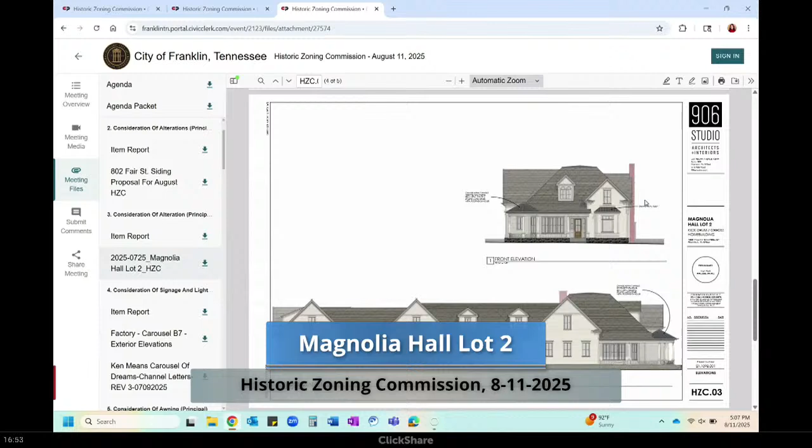The proposal includes an alteration to the approved plans to change the roof material on the conical porch element from asphalt shingle to standing seam metal. The standing seam metal proposed is already found on the front facade over the box bay window, so its use on the front porch roof is appropriate. Staff recommends approval of the roof material alteration with conditions.

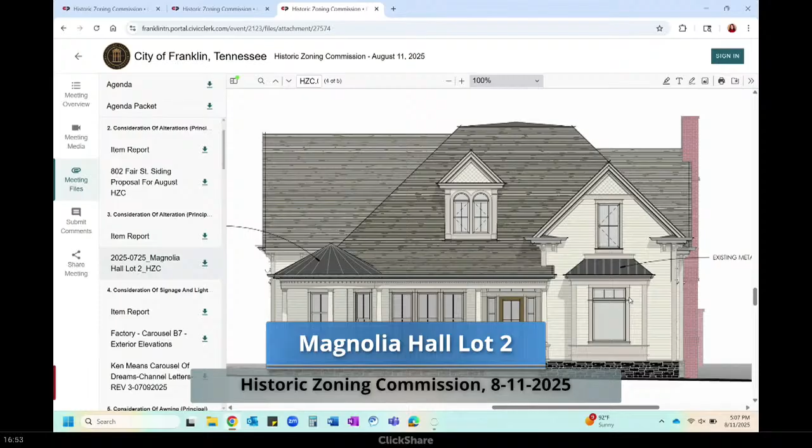Thank you. Ms. Lombard noted the reason for the change was that their shingle manufacturer would not warranty shingles on that shape, and she offered to show samples of the material if the commission would like to see them.

Any citizens want to comment on this one? Seeing none, I'll take a motion from one of the commissioners. Motion to approve with staff conditions. I'll second. Any discussion?

Man, you're a talkative bunch tonight.

Hearing none, I'll say I like that it coordinates and has a little metal. I think this started out with a little metal on it at some point, didn't it? It did. So this is a return to that, and I think we're trying not to draw too much attention to it. The shingle was probably a little toned down from that, but it makes sense why they need it to be metal, since it's a little low sloped.

All right, let's vote. All those in favor of the motion to approve with staff conditions, please say aye. Aye. All opposed? The ayes have it. Thank you very much.

Item number 4: consideration of signage and lighting at 230 Franklin Road, the Carousel Building.

The property at 230 Franklin Road is located in the Franklin Road Historic District. This proposal includes a request for the installation of 2 wall signs on the new Carousel Building at the factory. The signs are proposed over the entrance and windows on the front and rear elevations, and will be 19 feet by 4 feet 6 inches, or 85.5 square feet each, located approximately 17 feet 6 inches from grade.

The guidelines recommend wall signs be a maximum of 9 square feet, proportionate to the building facade, and a maximum height of 12 feet from grade. The proposed size and placement exceed these recommended maximums. Staff recommends denial of the application based on these guidelines, but if the commission votes to approve, recommended conditions are included.

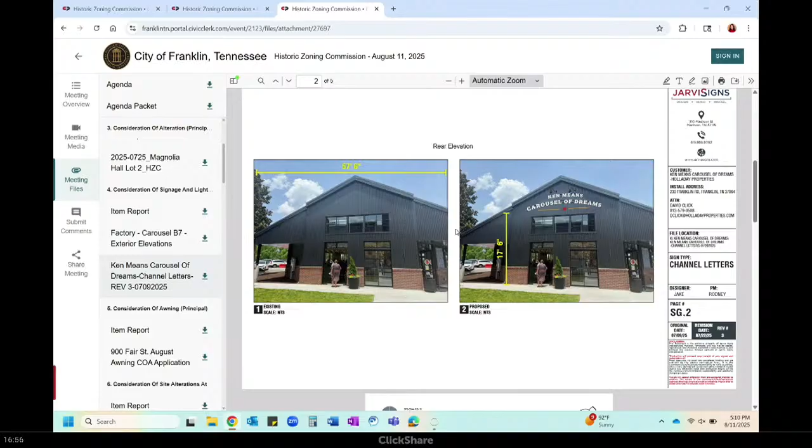Mr. Click explained they reworked the proportions of the sign, getting it down to 57.5 square feet, which aligns with a mural already approved for one of these elevations. They were able to keep the sign looking the same and keep the proportions the same, but reduced the overall scale down to 57.5 square feet.

Staff confirmed the mural was going to go in this same location, in that gable, approved with a modification of standards for placement, though the mural itself was never reviewed or proposed. They are now proposing a wall sign instead in the same location. The modification of standards was approved prior to alterations made to the building, which changed the location it could be in, since windows were added that pushed it higher.

Thank you, Mr. Click. If you'll have a seat, we'll see if there are any citizens here who want to comment on this. I don't see any. All right, let's hear from the commission. A motion, please.

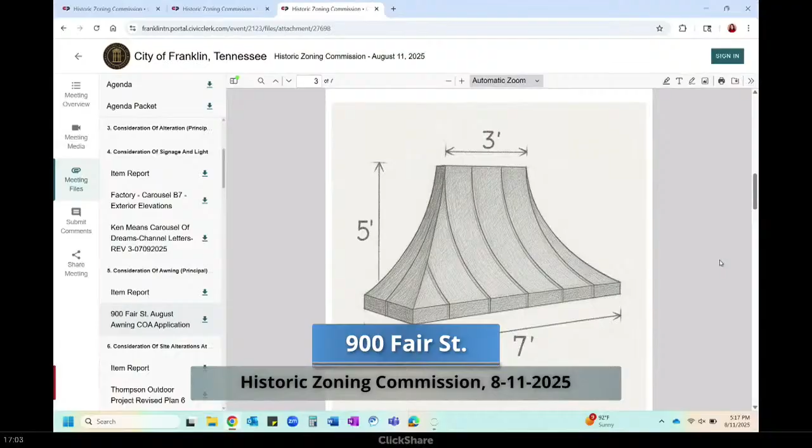This proposal includes the removal of the existing green arched fabric awning and installation of a copper awning with brackets over the entrance to the front porch. The proposed awning style utilizes a Juliet design, and the bracket design is proposed to be metal with a scroll design. The guidelines recommend using duck canvas or cotton and polyester blends with or without acrylic treatment, avoiding vinyl awnings, and that new architectural features should not be added.

The use of a copper material for an awning is not supported by the guidelines, and the proposed brackets add an ornamental detail that is not seen elsewhere on the front facade of the historic building. Staff recommends denial of the application based on these guidelines: use a material that aligns with the guidelines, and new architectural features should not be added.

If the commission votes to approve the application, there are conditions recommended. Mr. Scott, anything you want to add?

Sure. We understand that copper materials would not be prevalent in the historic district, although there have been copper awnings approved — I actually showed a couple of pictures there, the copper one that came through the commission and is in place right now. The color, we believe — we're choosing copper because we know it will patina down to look a lot like the rest of the house, which is bronzed.

Our fabricator very highly dissuaded against just a standing seam metal. He said that type of awning would not bode well in a metal material that's not copper — it would look cheapened to some degree. So we very much want to get rid of the rounded green cloth awning, which I don't think is very aesthetically pleasing to anyone that looks at it.

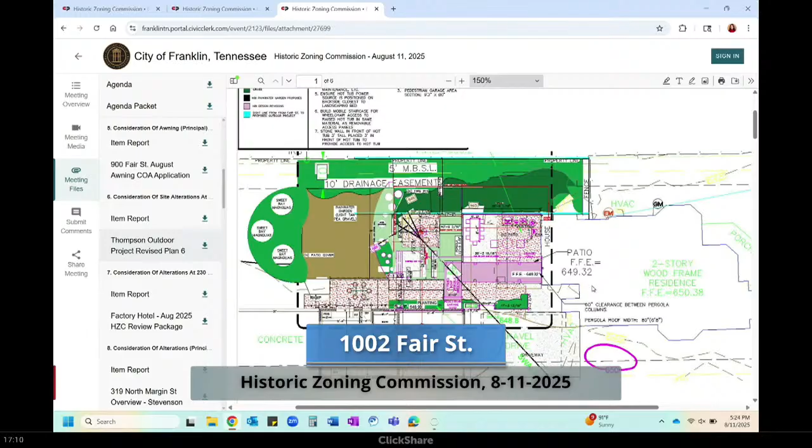The property located at 1002 Fair Street is located in the Hinchyville National Register Historic District, and this site features a circa 1885 one-story Queen Anne-style house with elaborate detailing and a circa 1950 concrete block garage, both contributing to the district. The proposal includes a request for two site alterations: installation of a covered pergola walkway and installation of a pea gravel rain garden.

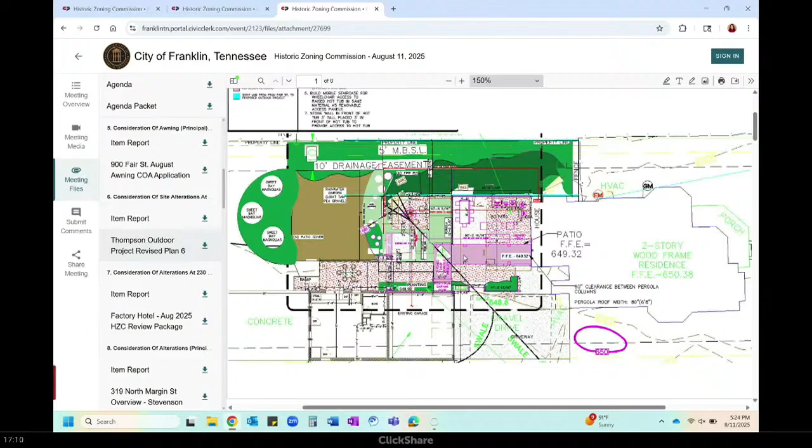The first request is to install a covered pergola walkway from the rear of the building to the side of the accessory structure, and the second request is for installation of a pea gravel rain garden in the rear yard. The guidelines recommend the following for other site and setting alterations.

Generally, site and setting alterations should be considered appropriate when undertaken in locations not visible from public view, do not involve removal of historic features, and do not detract from or overwhelm the context of the historic districts. The pea gravel rain garden will not be visible from public view, does not involve removal of historic features, and does not detract or overwhelm in the context of the historic district.

The design of a pitched covered pergola walkway will be visible from public view, and a pitched pergola design is not seen in historic districts and may overwhelm the context of the district. Staff recommends denial of the pergola walkway based on the guideline that site and setting alterations should be considered appropriate when undertaken in locations not visible from public view, and staff recommends approval of the pea gravel rain garden with conditions.

Thank you. Okay, thank you. Applicants, whichever one wants to talk, just let me know who you are. Well, my name is Jeff Fleischauer. I'm the contractor.

We were wanting to do the covered pergola on the walkway simply to give us a little bit of protection walking from the house all the way out to the garage. And then the pergola adjacent to that would be just coming off the house at about 10 feet and then coming straight out, and both of which are behind the house completely. So as far as visual from the street, you'd have to really try to see either one.

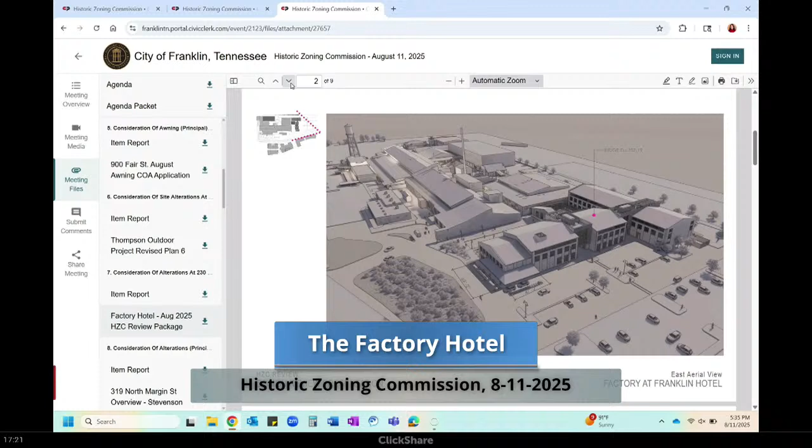Therefore, preservation staff only reviewed these items, as there are other items not called out that have changed from the previous submittals. For the first proposal of the metal roofing, gutters, and downspouts, it's proposed to utilize a Galvalume 5V metal roofing on the building. Silver Galvalume gutters and downspouts are also proposed. There are existing Galvalume and dark-colored gutters and downspouts on the campus, and the use of Galvalume roofing and 5V metal gutters and downspouts appear to meet the guidelines.

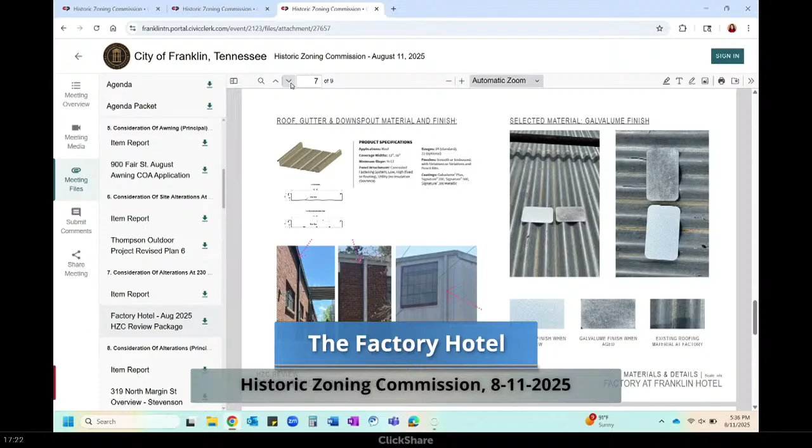For the mechanical equipment screening, it's proposed that the mechanical equipment be screened by the same material as the roof for the new proposed exhaust fans, which will be a 5V Galvalume material. The use of this screening color for the exhaust fans appeared to blend with the roofing material, which was supported by DRC members during the August DRC meeting. And then the final proposal is the change of design on this facade.

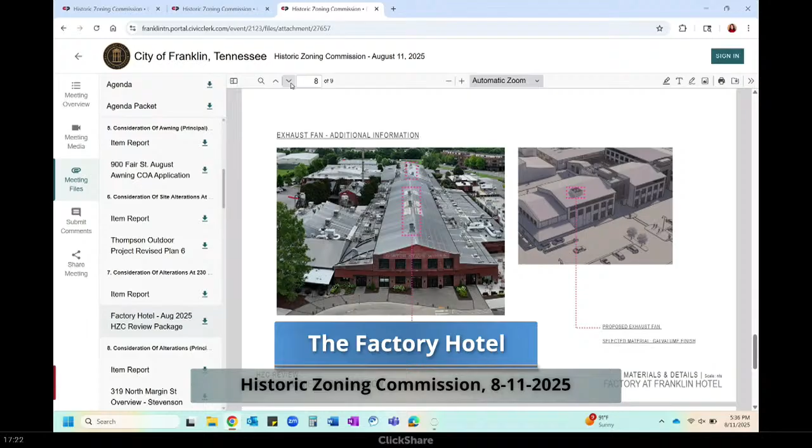On the right facade that will face the parking lot and the railroad line, a small portion of the building is proposed to be altered. The previous design utilized dark metal siding to the ground of the building and three large windows on each floor. The proposed change of design will have four ground floor windows surrounded by brick, and then dark metal siding will begin above the windows.

The guidelines recommend designing new windows to be compatible with the size, placement, rhythm, and relationship of solids to voids of those on nearby historic buildings. It is unknown what the size of the new windows are proposed to be and if they relate to the existing window sizes on the buildings of the factory. Therefore, staff recommends deferral of the change of the facade on those grounds, and staff recommends approval of the Galvalume 5V metal roofing, Galvalume gutters, Galvalume downspouts, and Galvalume metal screening for the new exhaust fans with conditions.

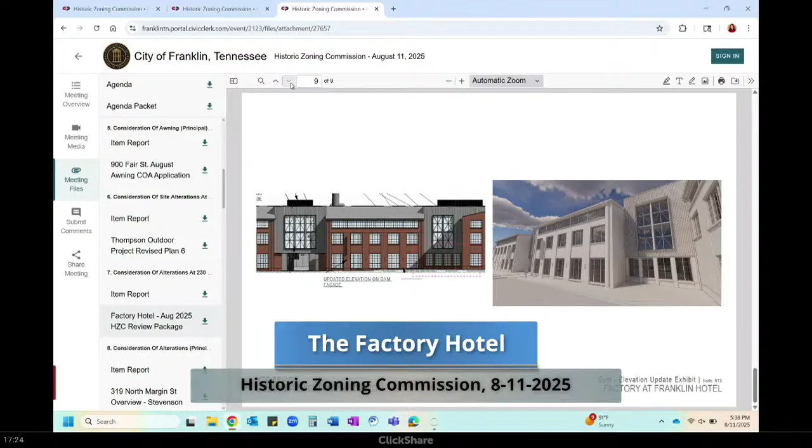Thank you, Emily. Mr. Click? Thank you. So I do want to distinguish—the reason we're here primarily is to check the box on this last COA item from the last HZC. This roof material was that one item, and that's the most important thing. We want to get the COA finished off so that we can work towards site plan approval, and I don't want the other items to get in the way of that.

As we're adjusting and working towards construction documents, things are going to come up that we'd like to adjust as it comes together. The other items are just part of that, so we're just bringing that through to you, just like we will in the future—it'll continue to happen, surely.

But those 3 items are ones that we feel confident in, we think are appropriate, and ready to discuss. The other items shown on here but not called out are things we're still working on. We'll bring them back through to DRC and then back through here as well. So the only item on here that I really need to touch on is the windows, the last sheet.

This is a change primarily dictated by the program inside. The ground floor is a fitness room, and so we wanted to add more windows to it to get more daylight in there. We think the intention of breaking the building apart is still intact. The windows are still with the same grid pattern throughout the rest of the building. But if we want to come back through DRC to discuss this in more detail, we're happy to do that.

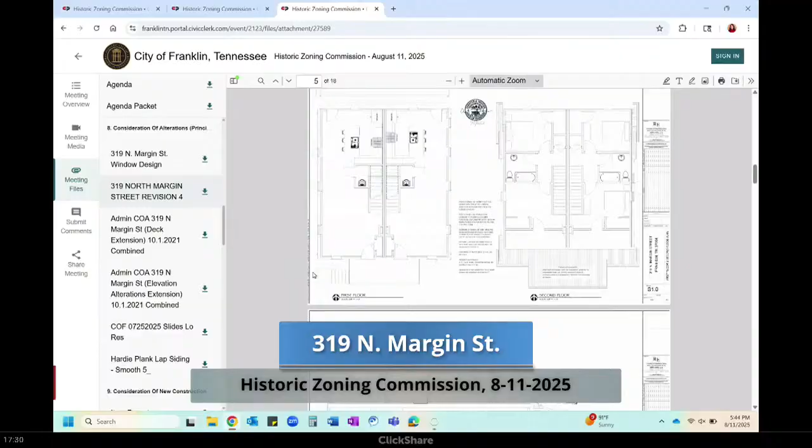So this property located at 319 North Margin Street is located in the downtown Franklin Historic District and features a circa 1900 one-story frame duplex. A COA was granted in 2021 for building alterations, including raising the building 1 foot, new wood siding on 3 facades, new cementitious siding on the rear facade, select window replacement, and deck expansion on the rear.

The proposal today includes continuing with the exact same approved plans, however, with 2 new proposed alterations, which include the use of a smooth cementitious siding on all facades of the building and replacement of all windows on the building. The proposed smooth cementitious siding will utilize the approved 5-inch reveal for the entirety of the building.

And the second alteration to the approved plans includes replacing the 2 original windows, which were to be preserved as a condition of approval on the issued COA. The windows were not able to be preserved due to termite damage and deterioration from past flooding.

And the proposed windows will match the approved window profile of the windows which were included in the COA that was issued. The guidelines recommend to replace deteriorated siding with siding that matches the original siding, and smooth cement board siding may be appropriate for replacement of deteriorated wood siding on rear facades. This request is instead to install smooth cementitious siding on all facades of the building, which is not appropriate. The request to replace the 2 identified original windows with the window profile previously approved for the remaining windows is appropriate.

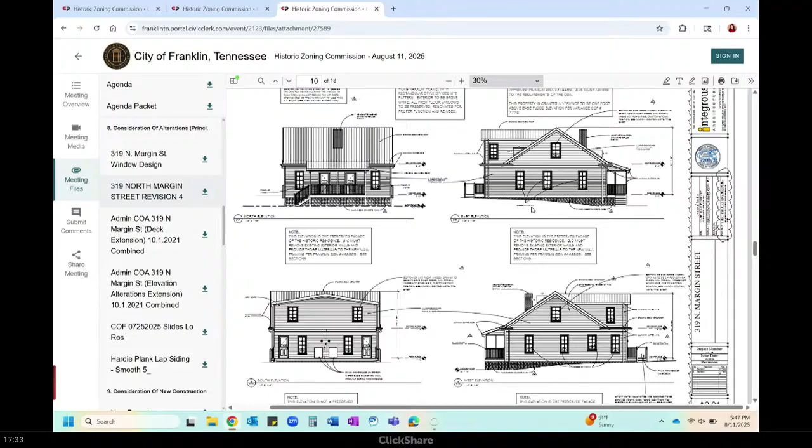It's approved in the back, and you won't be able to tell the difference. I don't have to paint it every 3 years, and to me, it makes sense. This stuff's pre-painted, it lasts forever, and I think it would be best for the house and the community. We've spared no expense on this, trying to get it right. You can see the 2 pages of history of what we've done with the city, battling through this. It's been very difficult, and we just want the best, and I feel this is the best for the house.

Are there pictures of the house somewhere? Yes. I thought I remembered seeing it, but I didn't. Maybe you brought it up and I wasn't paying attention.

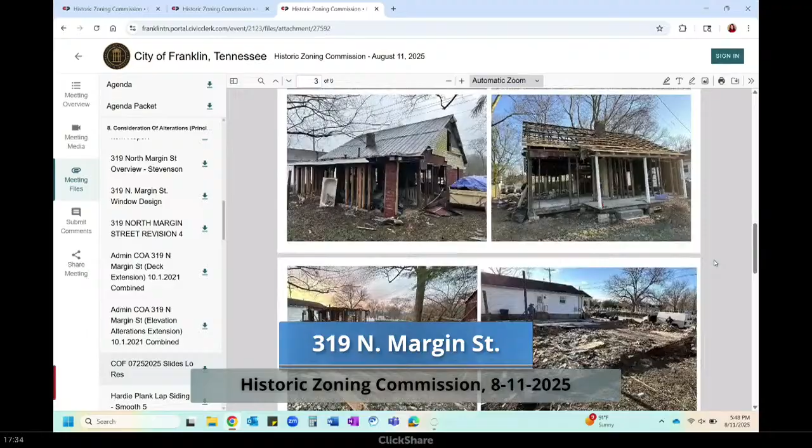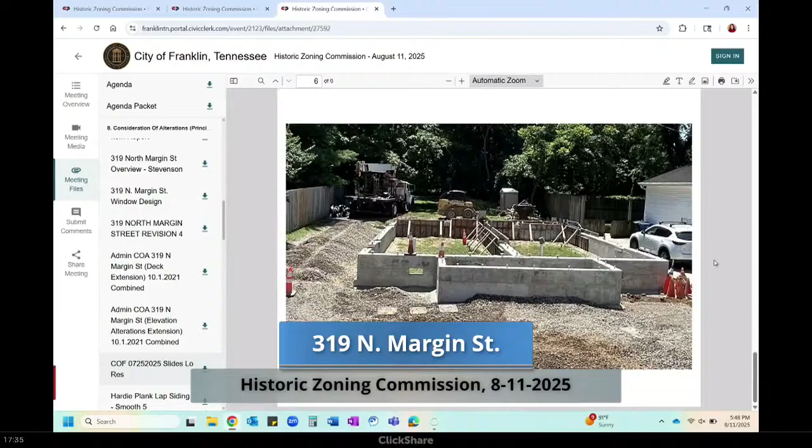That's pre-lift, right? It was not able to be lifted. We got started on it. There was no foundation. The termites were halfway up. The house had been burned at least twice. It had been vacant since 1990. 2 other developers had tried and failed on it. We're currently ready to get to work. We can have this thing knocked out in no time if we can just get our approval and move ahead.

Okay, perfect. If you'll grab a seat, sir. Mr. Stevenson, we will let any citizens who want to comment on this one come up. Anybody here? No? Okay. All right, I would take a motion from one of the commissioners here.

I move to approve it with the cement board if it's the same width as the current laps on the siding. Okay, Holly, so you want to approve both elements, the window replacement and the siding, with staff comments?

Is there a second to that motion? Second. We need Ms. Thompson to state why she's going to go against staff recommendation. So staff is recommending it be actual wood.

Is that the only option other than like replacing vinyl or whatever? That was what was originally approved, to utilize wood siding on all 3 facades, and it's recommended to use cementitious siding only on the rear for historic residential buildings.

I guess I think if it's approved on the rear and it looks basically the same and it's longer lasting, to me it seems like it would not change the look, especially if it had vinyl in the past. And I don't know if that would be allowed to replace it with vinyl, but that seems like a lot worse option than doing the cement board. So I'm going to second.

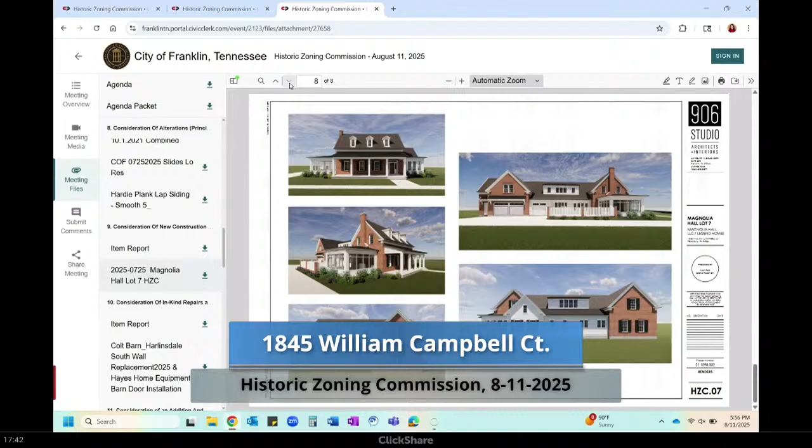The application has been to several design review committee meetings to discuss the overall architectural style of the proposed building. The proposal includes the construction of a 2-story cross-gabled residence with colonial revival architectural style features. The placement, scale, massing, height, and architectural materials all appear appropriate per the design guidelines.

For the materials: the foundation level of brick buildings, the guidelines recommend should be delineated through some type of belt course such as soldier or sailor coursing, and should have a height of at least 1 foot above grade on the primary elevation.

It's recommended to use wood or composite materials for windows that have the appearance of wood, which are appropriate for the windows, stops, jambs, and trim. While the window specifications have not been provided as part of the application, they should align with the guidelines.

Several elements such as the lighting and hardscaping materials have not been provided, and the guidelines recommend using simple fixtures appropriate to the scale of the house, constructed of historically prevalent materials, and avoiding ornate carriage lights or fixtures reflective of the 18th century, and using durable materials historically typical for driveways such as gravel, concrete, brick, and asphalt. Staff recommends approval of the application with conditions.

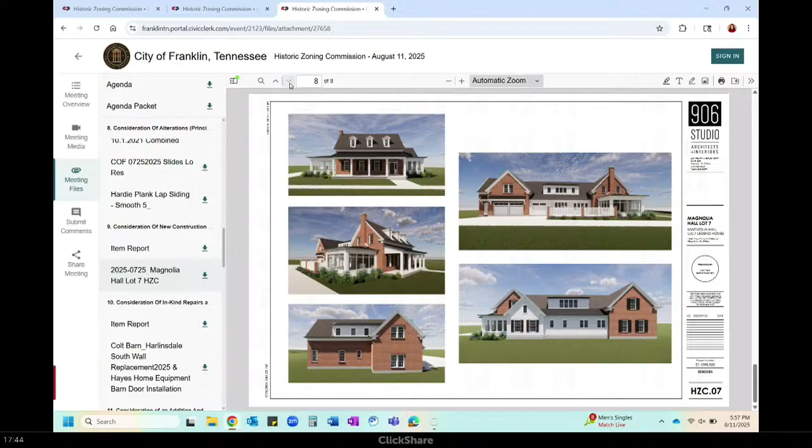Thank you, Ms. Lombard, anything to add? No? Okay, we're good, quick and easy. Are there any citizens who wish to comment on this application? Nobody ever wants to talk.

All right, any motion from the commission? I'll move to approve with staff's recommendations. Thank you, Madeline. Any second? Second. Thank you, Michael.

Discussion. That adjustment made a huge difference, it looks great, it's come a long way, it's looking good, thank you. Anything over here? I appreciate all the work the team has done to get this scale feeling better. I think it's vastly improved, so thank you for that.

With no other comments, let's vote on the motion to approve with staff conditions. All those in favor, please say aye. All opposed? Okay, the ayes have it. Motion passes, thank you very much.

Item number 10, consideration of in-kind repairs and alterations to the Colt Barn and Hayes House Equipment Barn at 331 Franklin Road, at the Harlinsdale Farm. If I don't see Miss Lisa here, is someone here from the Parks Department? If y'all want to come on up and hang out for just a moment, Emily's going to give a staff report, and we may have you give us an overview.

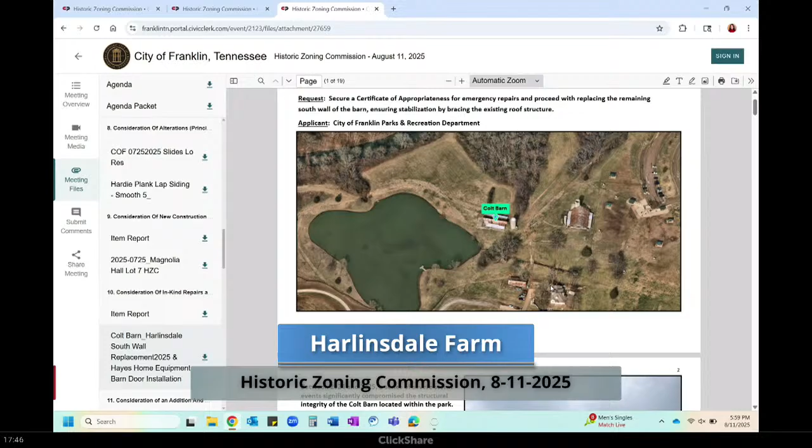First is the Colt Barn, here it is on the map, showing its location on the site. Where my mouse is showing, that's the Hayes House. This is the Colt Barn, and this is the Hayes House Equipment Shed. The Colt Barn is located behind the Hayes House and closest to the pond.

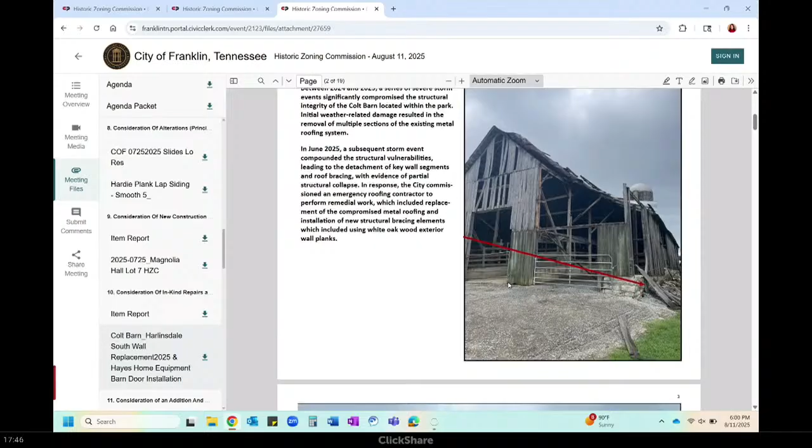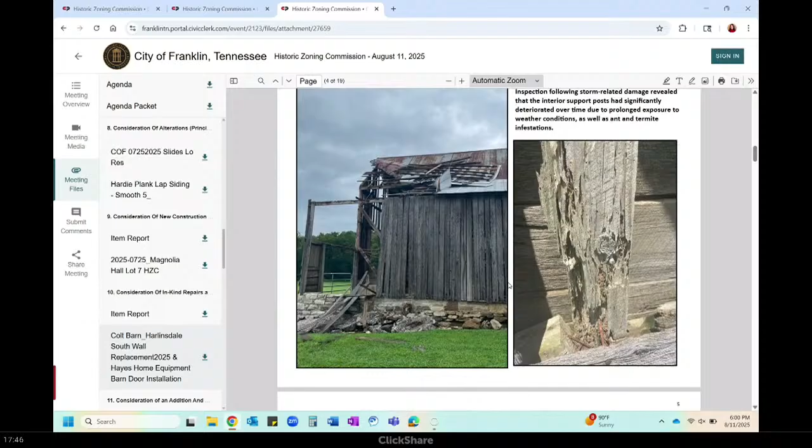The application notes that within 2024 and 2025, severe storms compromised the structural stability of the barn, and emergency actions were taken to ensure the integrity of the barn. The proposal is seeking a retroactive COA for the emergency repair work and the restoration of the rest of the facade of the barn.

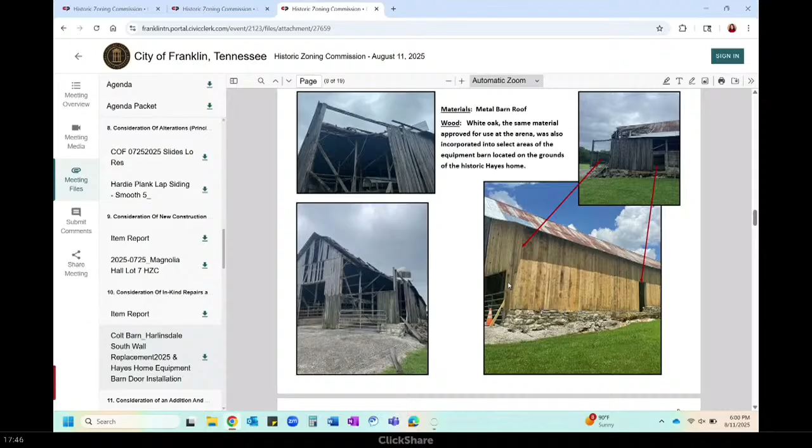The repair of the barn is supported by the guidelines. It is recommended to try to preserve as much wood material as possible on the site and replace it when restoration is not feasible. This slide shows the siding that was replaced, and this is the remaining siding proposed to continue to be replaced. It's 45 feet in length.

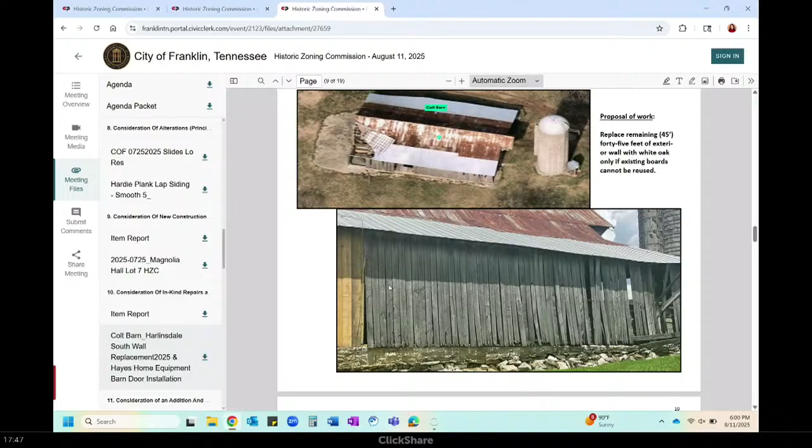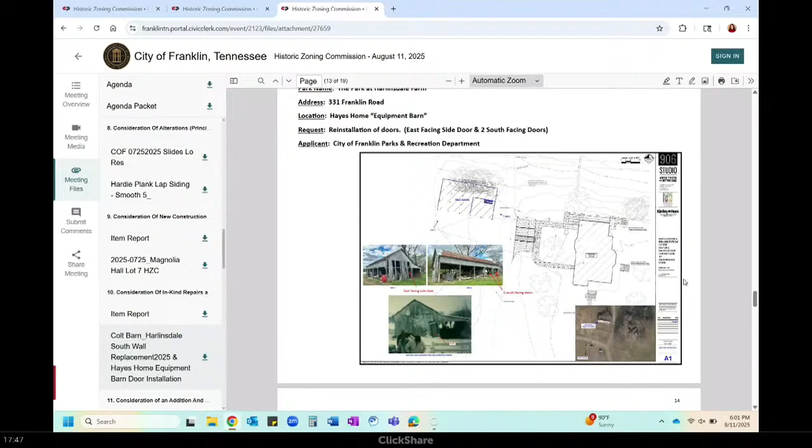Moving on to the Hayes House Equipment Shed, located right beside the Hayes House, it is proposed to recreate doors seen in historic photos on the east and south elevations. On this elevation, you can see there historically were two doors. Currently there are none, so they are proposing to replace them. On the facade facing the Hayes House, it is proposed to recreate the door seen right here.

By utilizing historic photographs of the barn, the recreation of the doors on the southern and eastern elevations is supported by the guidelines. It is recommended to reuse existing wood in good condition currently on site. Since this is a city project, staff does not make a recommendation, but there are some potential conditions should the Historic Zoning Commission approve the proposal.

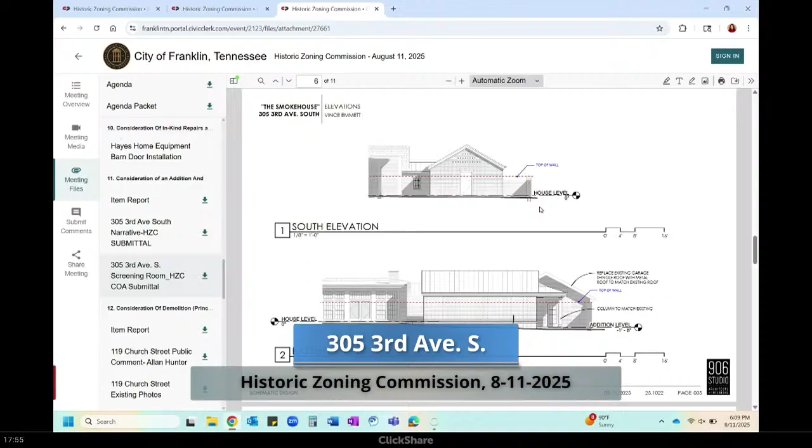All right, good evening. Mike Hathaway, 906 Studio Architects. Thank you guys for your time. I know it's been a process, and we've had a lot of conversations about this project. Appreciate all the insight. We are, as you guys are, trying to do the best for the community as well as this homeowner.

Relative to the roof, you've probably seen that the only piece of this whole building that is asphalt is that one garage. So I think the request was for more continuity in the design overall. We definitely don't want to see that be the holdup for approval of everything, but we would request your consideration for that one section being metal.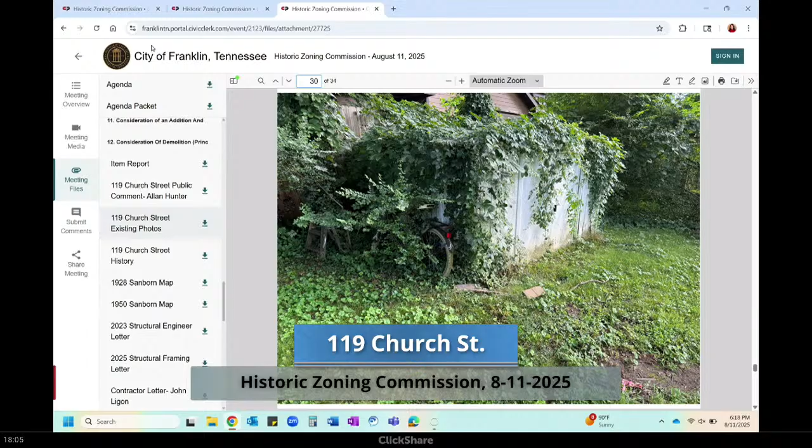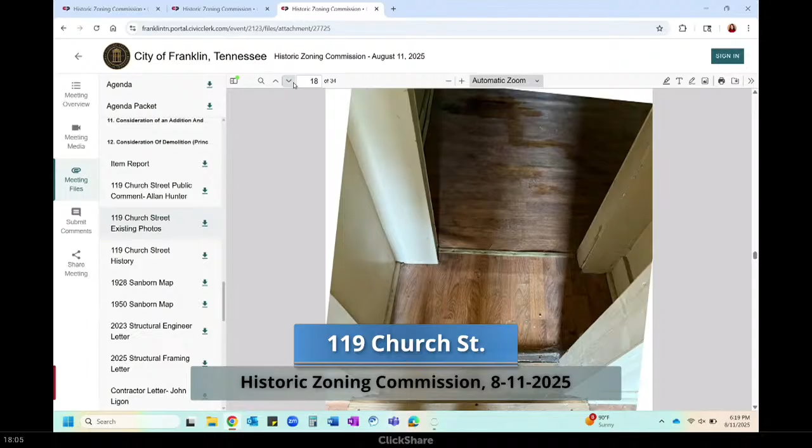For the principal building, the guidelines recommend conducting routine maintenance and major repairs on historic structures to ensure their preservation. Demolition is not permitted unless there are extraordinary circumstances. The guidelines provide that demolition can only be approved if the Historic Zoning Commission deems one or more of the following conditions met: first, if a building has lost its architectural and historic integrity and its removal will not adversely affect the district's historic character.

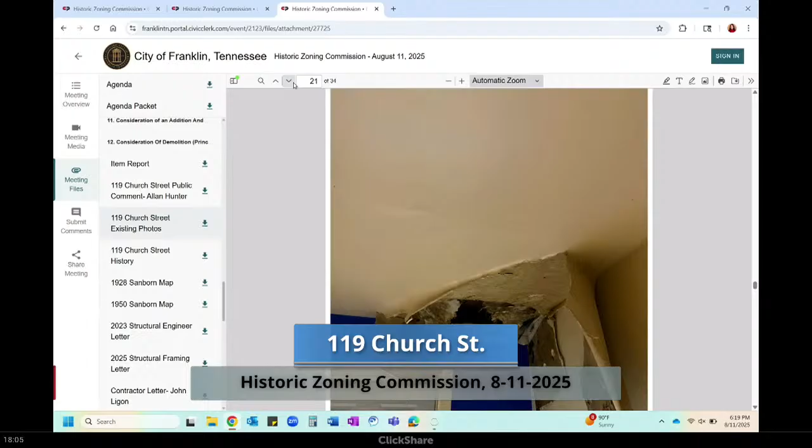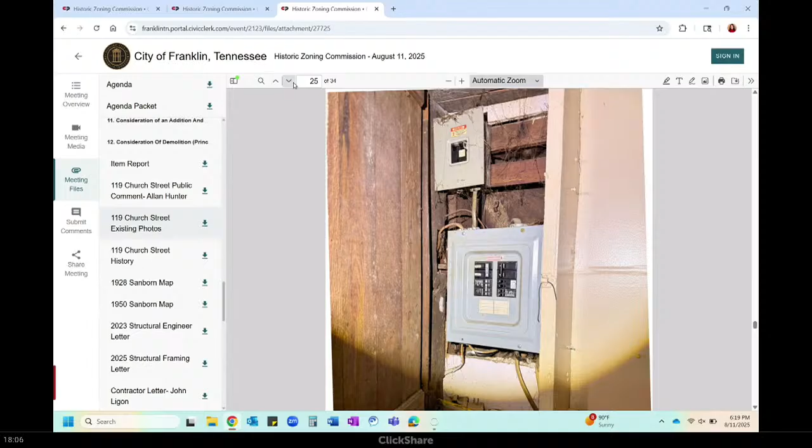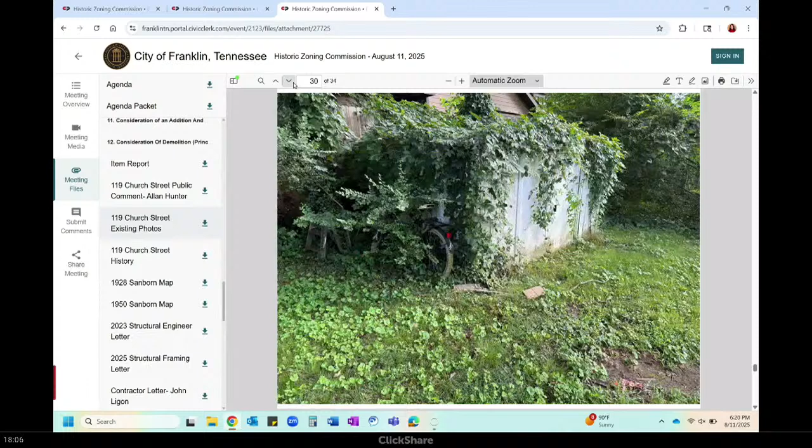Second, if denial of the demolition will result in an unreasonable economic hardship on the applicant as determined by the Historic Zoning Commission. And third, if structural instability or deterioration of a property is demonstrated through a report by a structural engineer or architect with demonstrated experience working with historic structures. Such a report must clearly detail the property's physical conditions, reasons why rehabilitation is not feasible, and cost estimates for rehabilitation versus demolition and construction of a comparable structure.

In addition to this report, there should be a separate report detailing future actions on the site. Within this submittal, new cost estimates were provided for both the rehabilitation of the existing structure and the complete reconstruction of a new one. The estimated cost to rehabilitate the building is $975,000, and to build a new structure will be $590,000. A contractor who builds new custom houses provided these numbers on behalf of the applicant.

It is unclear whether the contractor has experience working with historic buildings, as their website states that they handle any new construction need. While photos have been provided showing the deterioration of the building, and cost estimates have also been provided, those estimates were given by a contractor that does not have experience with historic buildings.

Therefore, staff recommends denial of the demolition of the principal building, based on the ground that structural instability or deterioration must be demonstrated through a report by a structural engineer or architect with demonstrated experience working with historic structures. Such a report must clearly detail the property's physical conditions, reasons why rehabilitation is not feasible, and cost estimates for rehabilitation versus demolition and construction of a comparable structure. In addition, there should be a separate report detailing future action on the site.

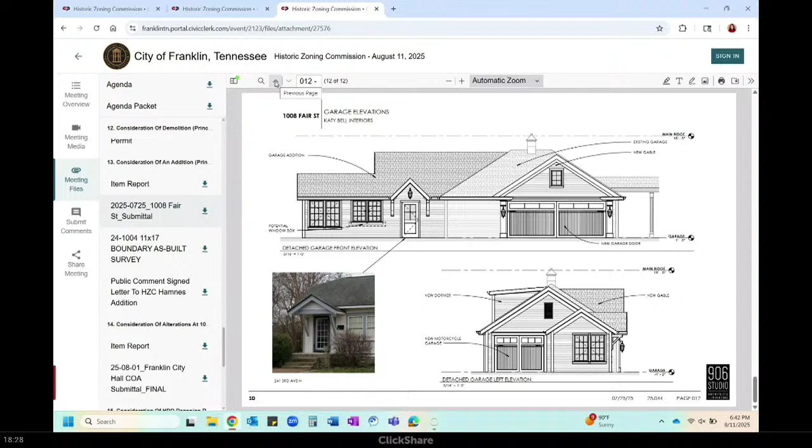Proposed alterations to the existing structure include the addition of a dormer on the rear facade and the addition of a front-facing gable. The roof pitches of the roof forms have not been included. Neither information nor specifications for the materials, details, windows, or garage doors have been called out in this application. A 420-square-foot addition is proposed to the existing accessory structure as well.

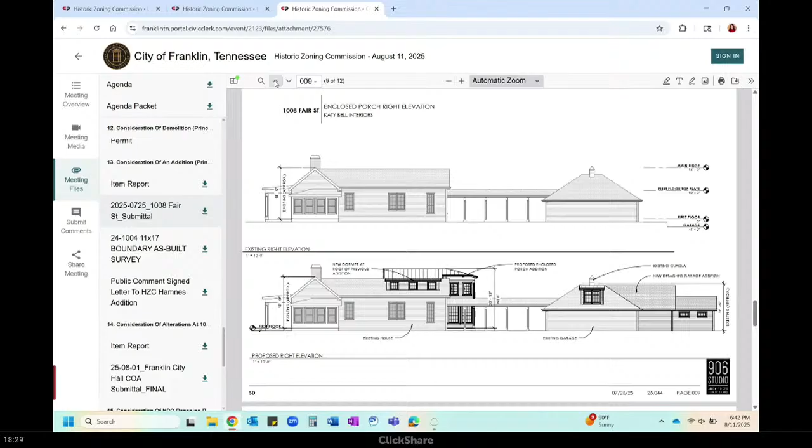The proposed alterations and additions do not increase the compatibility of the structure and appropriateness of the structure within the district, and the proposed alterations and additions create a mass that is not consistent with the massing and scale of surrounding historic accessory structures. A more thorough review of the proposal cannot be completed as information or specifications for the materials, details, windows, garage doors, or lighting have not been called out or included in the application for review.

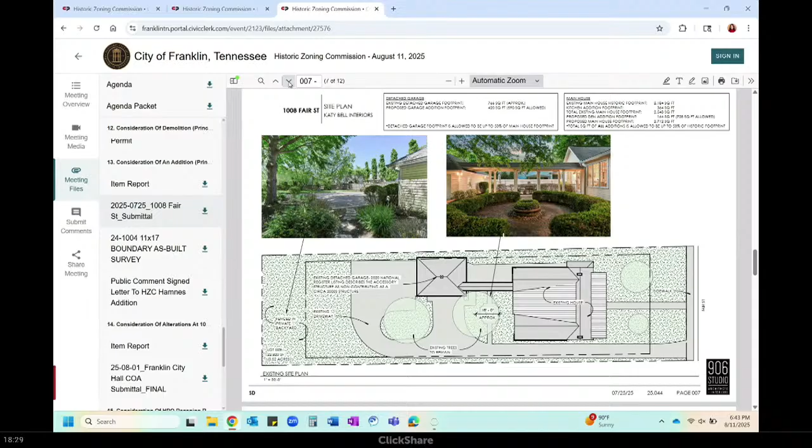Staff recommends denial of the addition to the principal building and alterations and addition to the accessory structure based on the guidelines listed in the staff report. Thank you. Thank you very much. Mr. Lane, would you like to add some comments for us?

Yes, Jacob Lane. I wanted to clarify the roof pitches: the dormers do follow code, they are 3-12 for the dormer. And also reiterate that the front facade will not be touched. The character of the historic home is very important to us. We want to carry that character through to the back, but would love to hear your comments.

Okay, thank you. Did you want to share anything? Not yet. Okay, thank you. Well, this is your chance. We'll wait for y'all. Okay, grab a seat, please. Thank you so much. Any citizens wish to comment on this particular application? Okay, hearing none, let's go to the commission for a motion, please.

Just to clarify, there was one public comment that was submitted and published with the agenda packet. Okay.

Move to deny this application based on all of the staff's comments. Is there a second? Second.

Deny with staff comments. Any discussion here? I'd like to invite the applicant to DRC. Anything else, anybody?

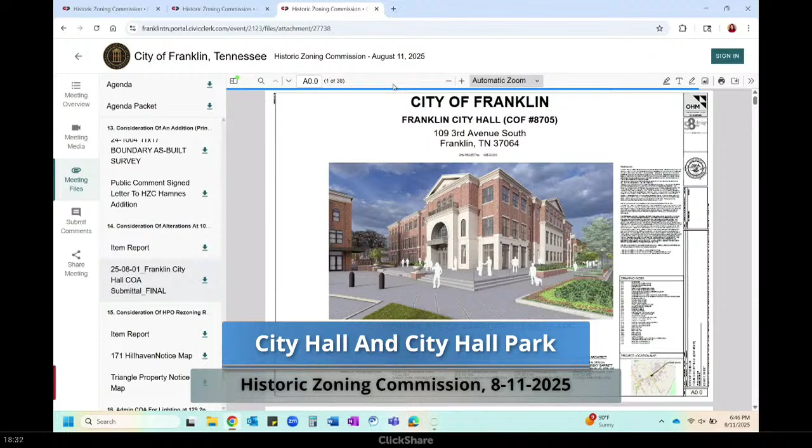The property at 109 3rd Avenue South is the site of the previously approved demolition and construction of the City of Franklin's new City Hall. The proposal includes the following items: the rooftop mechanical screening, roofing materials, gates and railing, windows and doors specifications, lighting for the building, site, and park elements, and hardscaping.

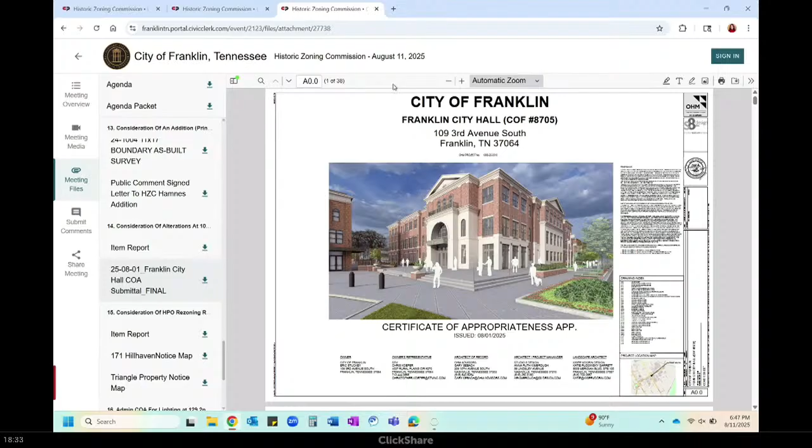All of these proposed items appear appropriate per the design guidelines, but since this is a city project, staff does not make a recommendation, but there are some potential conditions should the historic zoning approve of the proposal. Thank you very much.

Miss Anna Ruth? Okay, wow, technology's working. Hang on just a second. My mouse isn't working. Okay, there we go.

Good evening, my name's Anna Ruth Kimbrough with Studio 8 Design. I am the design team representative for the new Franklin City Hall. Gary Seaball with OHM Advisors, he's our architecture partner on the job. And then we have Gary Vogren here, who is with KVD, the landscape architecture firm.

As staff mentioned, we have several items that were conditions of approval for the previous COA, so we're going to go through those quickly. I know some of you weren't at the DRC meeting with us, so if you have any questions, feel free to interrupt, or we can wait till the end as we go through each one of these items.

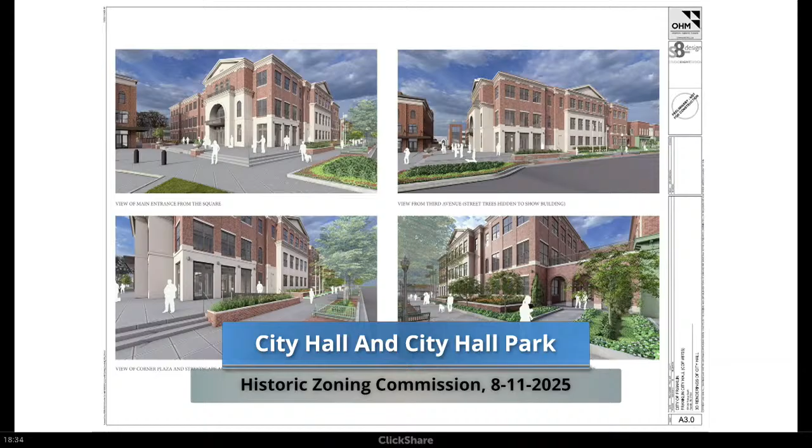The first item I want to go over is in our last COA voting meeting, it was brought up that the steps at the plaza on the corner should be squared off instead of rounded. So we have made that change, as you can see in the top left rendering. We also lowered the height of the brick planters, which are along 3rd Avenue at that ADA ramp, and then the plinths on the front entry piece.

And then we're bringing tonight the mechanical rooftop equipment screening material, which we have a sample here, which is in the antique bronze to match the windows and other details on the building. There'll be a combination of louvers and solid panels.

And then we have an enclosed rooftop penthouse that will have clad in thin brick to match the brick of the City Hall building. And as you can see in the renderings in the top right and bottom left corner, you cannot see the mechanical rooftop screening from the square or from West Main. And you can also not see it from the alley because the alley's right up against the building and it's set back far enough.

We've also brought the roofing material for the pediments that you can see in the top left rendering, which is this soft gray material here, metal roofing, which complements the limestone pediments on the main City Hall building, and then on the stair enclosure, if you remember, that's in the park that goes down to the parking garage. And then this slide's good to reference back to as we go through all the other elements.

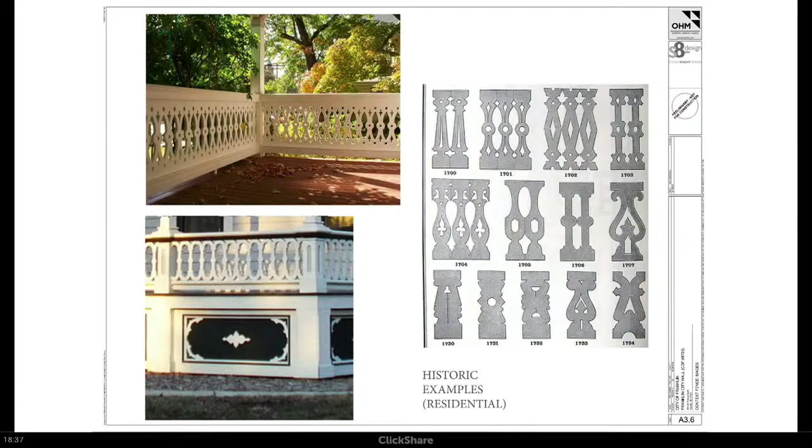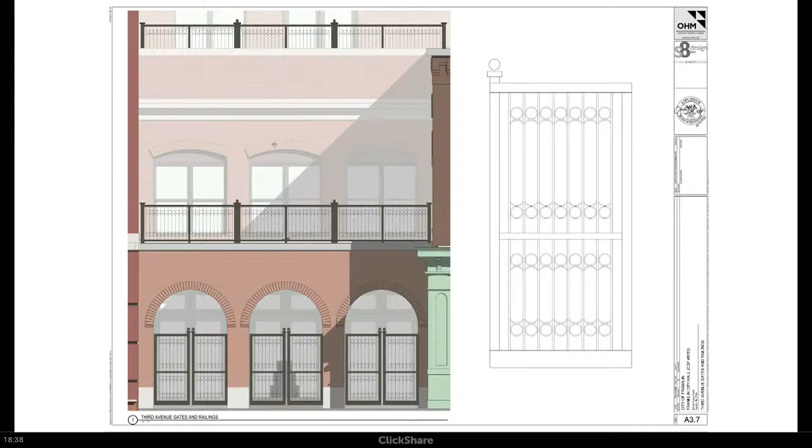So the railing is on the second floor of the arcade connector in the courtyard, and it would also be the design for the gates that go into the courtyard. Those would remain open during the day and are just closed at night for security. And then this is the railing on the third floor on the entry elevation, same design.

When we came to you previously with the windows, we had a clad wood window from Marvin. As we've developed the design, we've run into some issues with commercial hardware working on a clad wood door. The type of commercial hardware we need on a city hall is electrified for card readers and those sorts of things, and panic bars that have a dowel down through them that's not usually put into wood-clad doors.

So we started researching historic examples of aluminum doors, and we found this company, Boyd, that has a nice, almost tapered profile that looks like the putty glazed windows we discussed in our previous meeting. And they can accommodate the hardware.

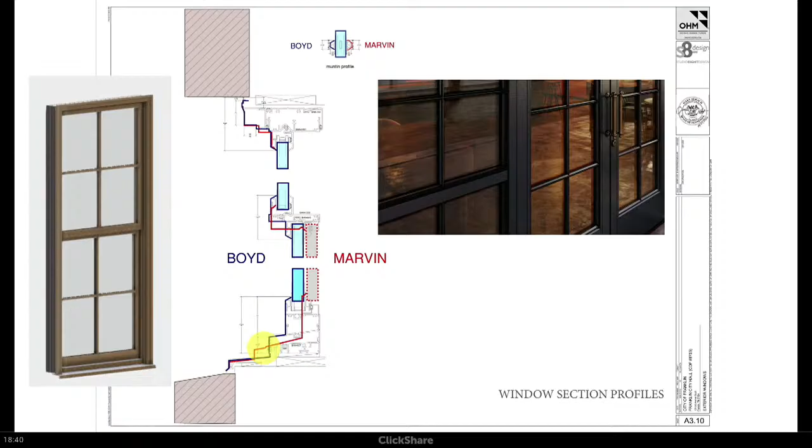You can see the tapered muntin bar profile that is reminiscent of the old putty glazed window. Before, on the Marvin window, some comments were that we had an ogee profile and a larger flat on the taper that might not be as historic as what we were looking for. Don't pay attention to this being black, because this is cut from a laser cutter in plastic just to show you the profile. This material will be the same as the window.

This 3D view will give you a better view of what the sill will be, because I know in DRC there were a lot of questions about that, since this is now what the sill is going to be. Highlighted in yellow, we went back to Boyd to ask if they could decrease that step in the sill, and they were able to decrease it 5/8 inch more. So that's just showing you the change. Thank you, Gary.

And then in DRC we also talked about the scale and proportion of the muntin bars in relation to the overall size of the window. So this is showing you what it would look like in the clad wood Marvin versus the Boyd with 3/4 inch muntins. We feel like the scale of the 3/4 inch works well with the scale of the window.

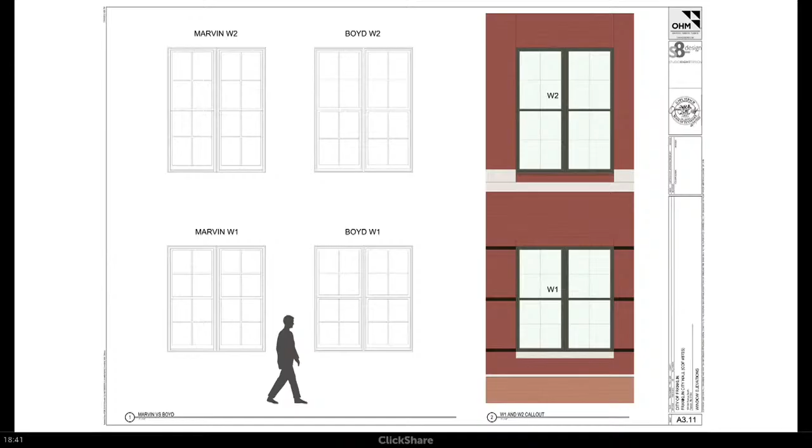Again, this is the materials, just to remind you.

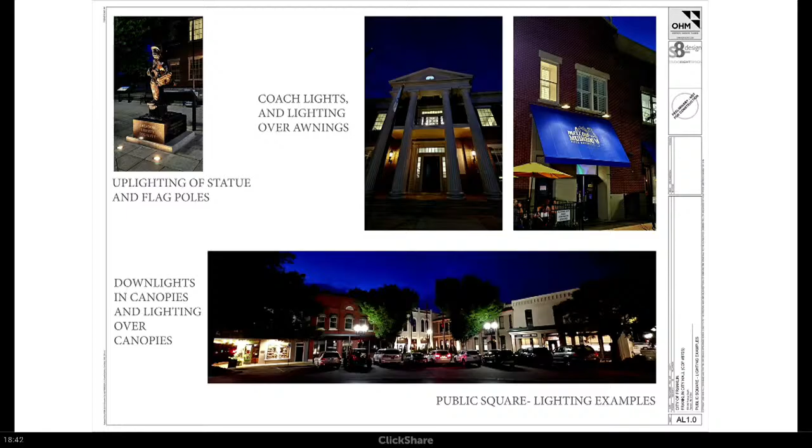There's uplighting of statues, and the rest of the square along Main Street is predominantly lit by street lights, but those street lights are a lot closer to the buildings there, about 8 feet away, whereas along West Main our streetscape is deeper at 20 feet, so we won't get the same amount of light from the street lights on our site. There are also some sconces that light signage and some coach lights on Red Pony.

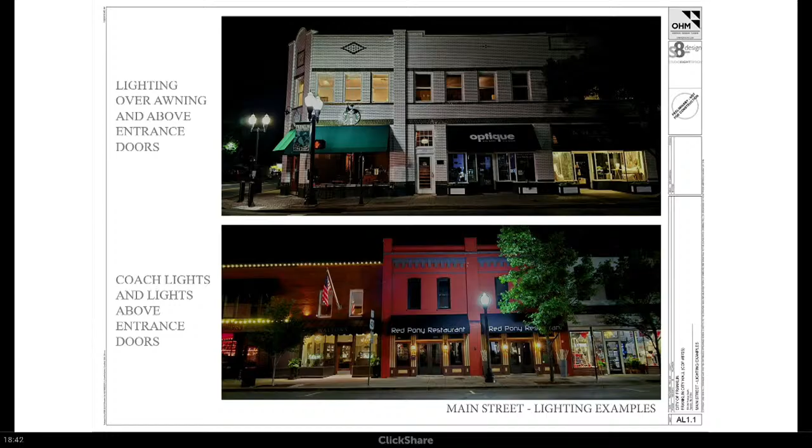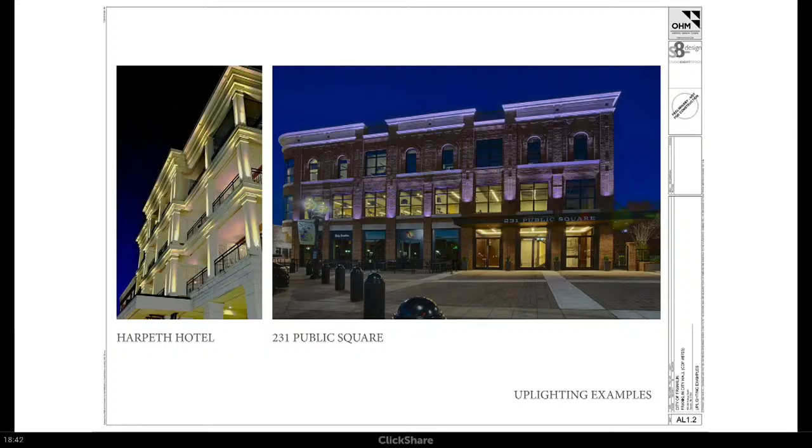On the more recent construction, these are taller buildings, 3 to 4 stories, with some uplight wall grazing lights that light up the architecture, but the cornice and entablatures catch that light from going into the sky.

So after our discussion in DRC, we're proposing keeping the pediments lit. For those of you that were there, when you take the lighting off the pediment, you lose that scale and form of the building, and it just looks like it ends at the cornice line.

And then, of course, we have the interior emergency lights on. Keep in mind that with our lighting system, we'll be able to adjust the intensity and get it to the way we want, just with today's current designs.

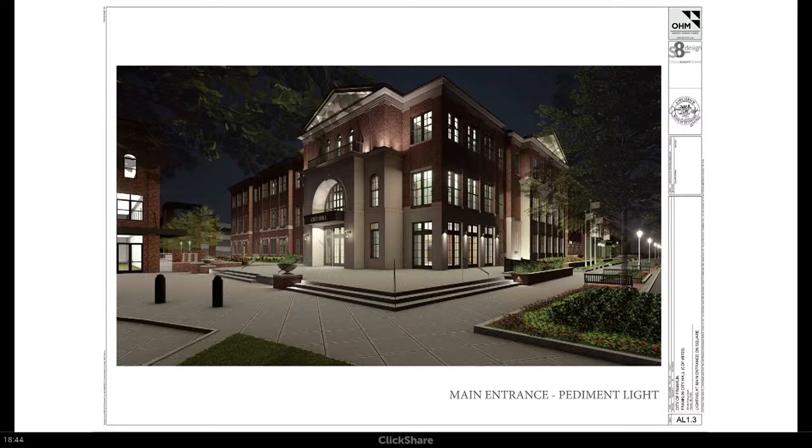Yes, we lowered the lights. It'll be a warm light, probably around 2,700 to 3,000 Kelvin, which is kind of like an incandescent warmer light. This is the rendering of the lighting on the boardroom portion of City Hall facing 3rd Avenue.

So it's across from the courthouse. We're also lighting this pediment and have some uplight on the pilasters at the top, which keeps the form of the building intact in the evening. And then we have some uplights on those limestone bases to either side of the boardroom portion of the elevation.

Again, downlights along the pedestrian path. You can see the street light in this one, how far away it is from the building, and it doesn't really illuminate the 1st and 2nd floor, which gives you a good example of how little light comes from the street lights when they're that far away. And then we have uplights on the flagpoles.

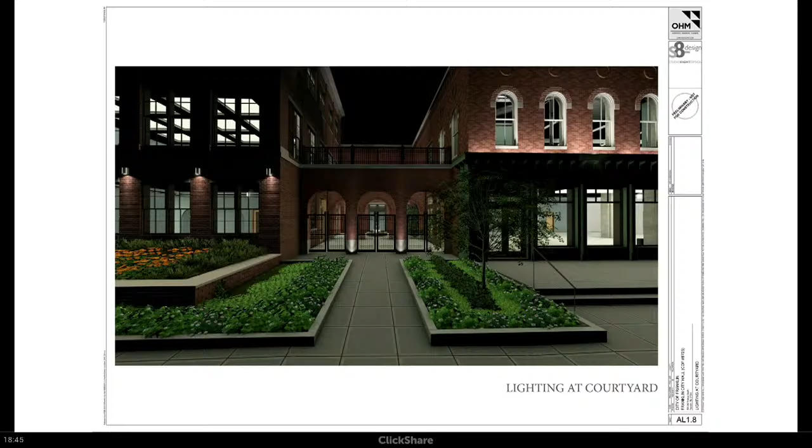This is the arcade connector between the City Hall portion of the building and the 2-story commercial. It's just a soft light to accentuate those arches. In the background, you can see there's a fountain element in that courtyard that'll be lit at night so that you can see it through the gates.

To your right, you see the beginning of the commercial. We do have some uplights on the 2nd floor of the commercial, which is different and a departure from what's on Main, but there's a couple reasons for this. This commercial is anchoring the park. It's further down 3rd Avenue, and the City Hall portion of the building separates the commercial from the square. So what we're trying to do is bring pedestrian traffic down 3rd Avenue to this commercial at night and feel like the lighting gives that a good destination and makes it feel safe for pedestrians.

This is it looking the other way from across 3rd Avenue, so you can see the 2-story commercial with the soft light along the 2nd story. There's also, if this became a restaurant, opportunity for outdoor dining, which also provides some safety and security for patrons of those tenants. You're not seeing any lighting on the sign band or on the signs because the tenants will bring that forward when they occupy the space.

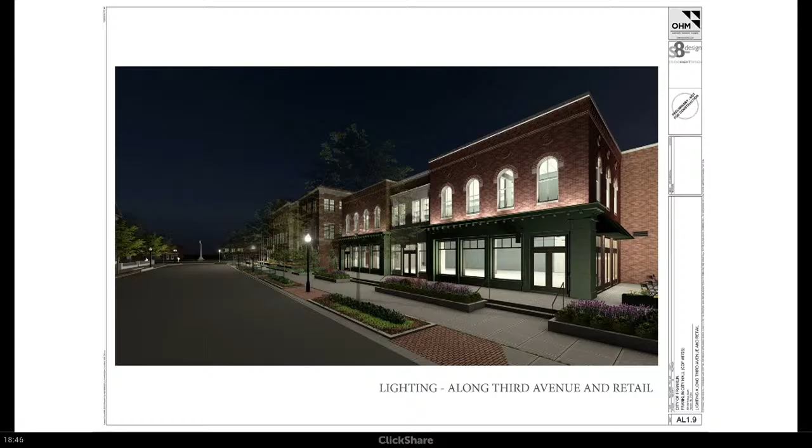And this is our stair enclosure with the stair down to the parking garage level. We talked about in DRC potentially flanking the entrance with coach lights, so we are showing that in the rendering now. We liked that idea, and we'll show you the actual fixture later on.

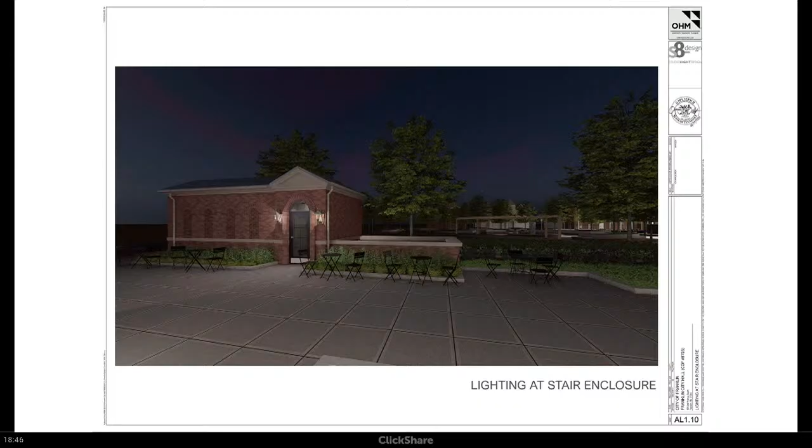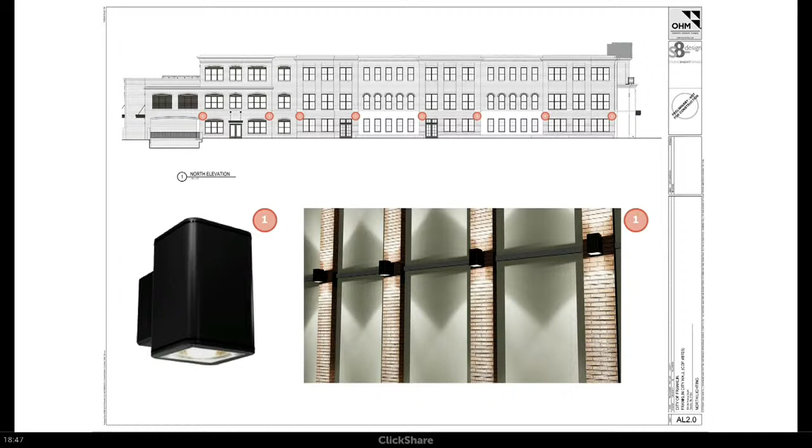I'm going to go fairly quickly, but these are just showing you what the fixtures look like and their locations on every elevation. This fixture in particular is meant to blend in with the brick, so it'll be custom color or painted to match the brick color wherever it is on the building.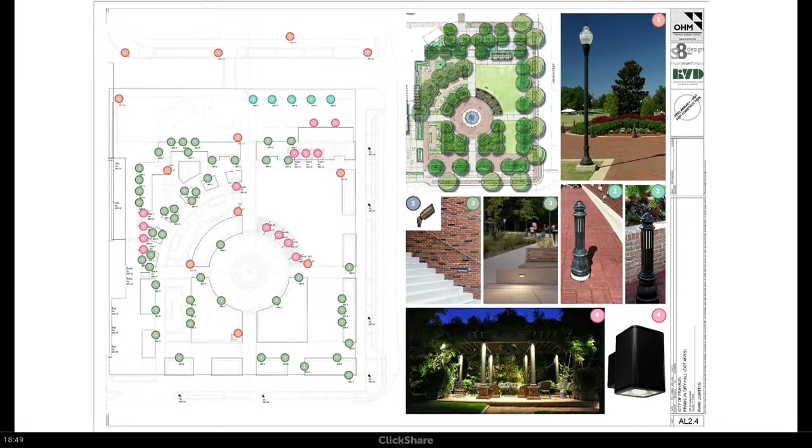We have some down lights on the vertical trellis elements, bollard lights along the back plaza area where the alley is, and the remainder is low light in-wall step lights that light the path. And of course, we have the main fountain in the center that will be lit.

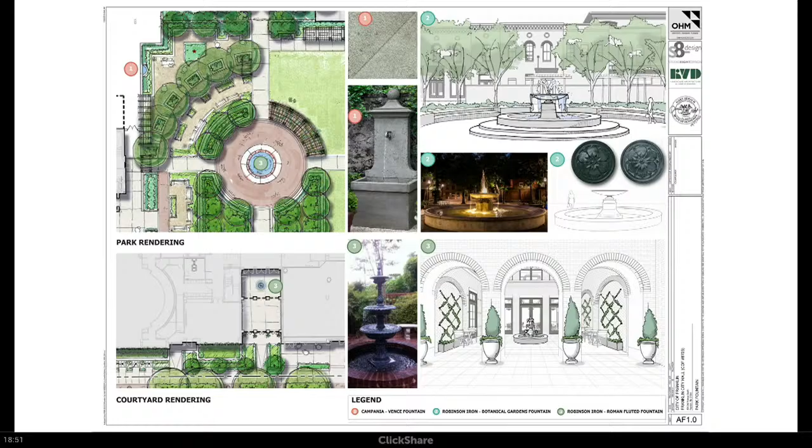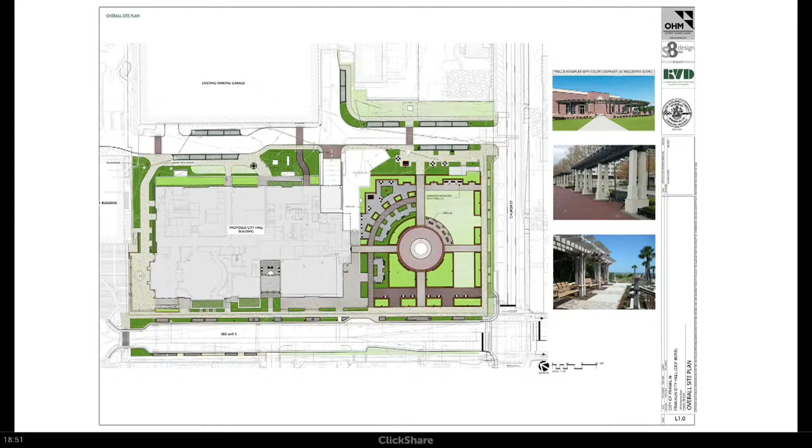These images are just showing you we'll have brick bases on the columns, and we're proposing the wood portions of the trellis in white - the columns and the arbor members. The column design comes from the kind of architecture you see in the residential porches around the site. So we have brick bases, white columns, and white pergola members.

And we're also proposing the swings in the Franklin green color to tie in with the Franklin benches.

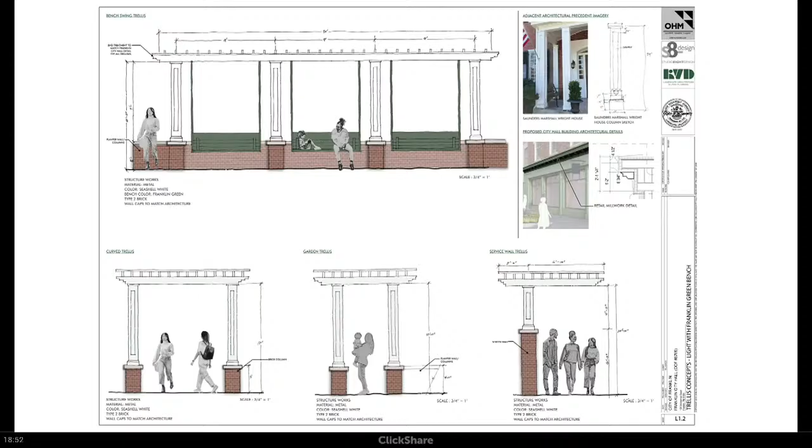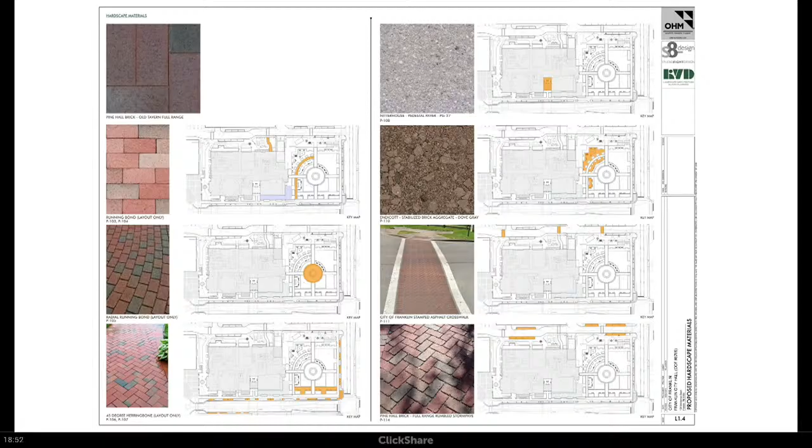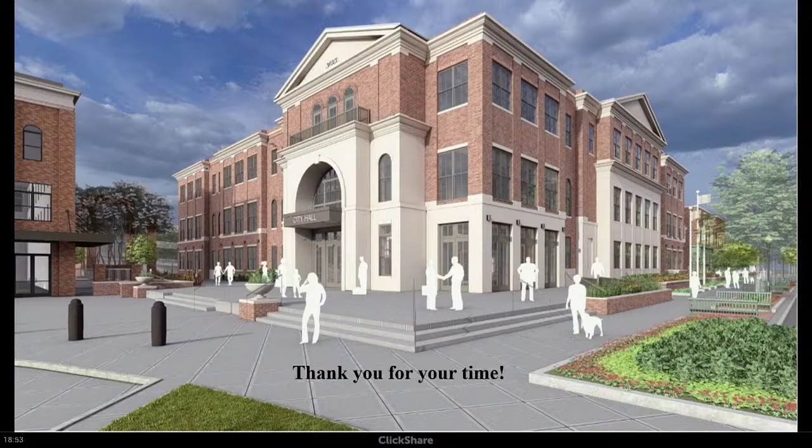They did. All right, not that this isn't interesting. All right, so no comments from the gallery.

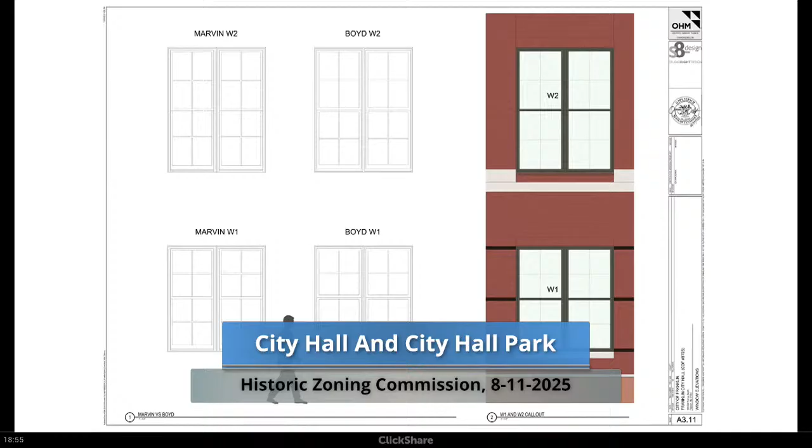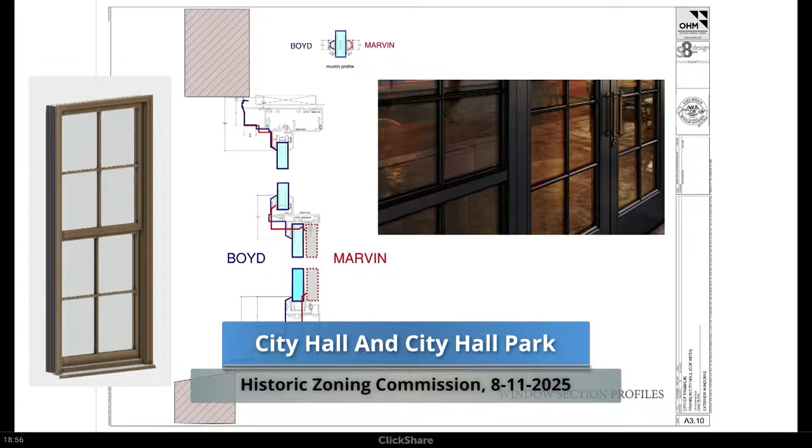Right here. Yeah, so this is the Marvin, okay, and this is the Boyd one. It goes straight to the tapered profile of the muntin bars, the perimeter muntin bars. So you do kind of see a double, where with the Marvin you see the one meeting rail, it almost looks like you have two elements. It's like that sash overlaps in a true double hung. It does, yeah, fully overlaps, and you just, yeah.

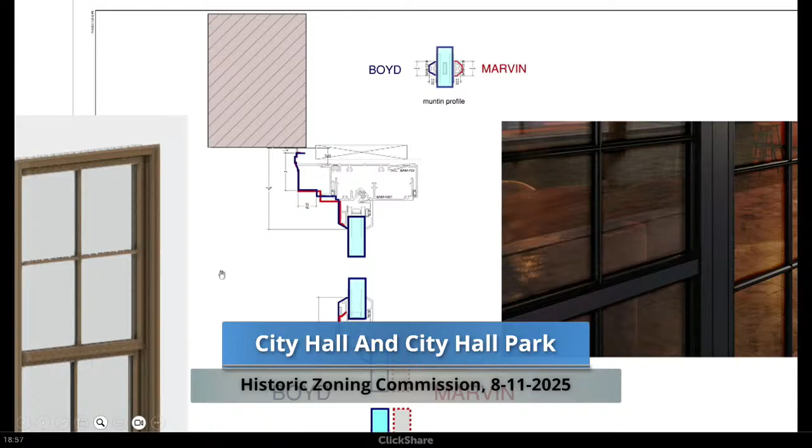But as I was looking at that, it kind of reminded me of something that would be flat. But this actually has a double hung appearance. Correct, correct, yeah, because there's an offset. So you do have that offset. Yeah, see, this glass is in this plane up here and this plane down here. So there is an offset. Okay, thank you for that clarification.

Thank you. I did have another question about the coach lights for the entrance. I'm assuming what I'm seeing is the coach light that attaches to the wall and has a gooseneck. That's the one being proposed and not the one we see. Right here.

See that one? Yeah, they only had a picture of the one that's pole mounted, but this drawing shows what the actual picture of it would look like on the gooseneck. Okay, thank you, those are my questions.

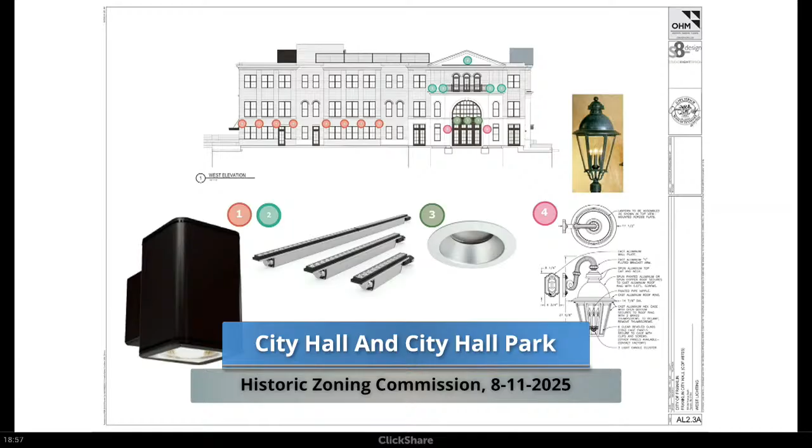Has that been discussed anytime during the design process or selection? Our security consultant had mentioned it, but based on Franklin's level of crime and future projection of crime, they didn't feel like it was necessary. But they do recommend that in big cities.

And we have made a good effort to try to keep the lighting subtle in the park, but enough light for security cameras to operate at night. So they do have the foot candle level that the security cameras need to keep surveillance over the park area too.

Anybody else? Madeline? Yeah, the only concern that I had was the style of the railings. Having a historic look, I'm looking at your other pictures, like at the brownstones, and I see it has similar elements with the details of it, but...

It just feels really contemporary to me. At design review, didn't you say it was going to be thicker than just that appearance? Yeah, sorry, it's taking me forever. So it is thicker, it's the thickness of what you would see in a steel or wrought iron railing. So it's half-inch pieces with 3/8 inch on the circular and arch pieces.

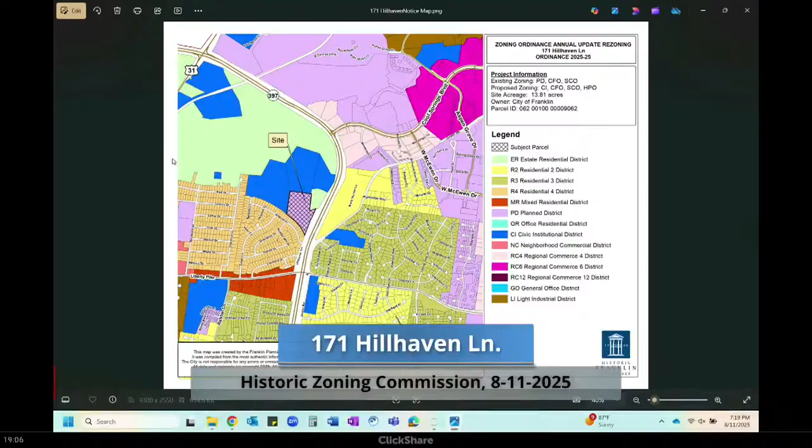For the property at 171 Hillhaven Lane, shown on the screen, it is positioned so that the property will connect to the city-owned portion of Roper's Knob. The Roper's Knob fortifications were entered on the National Register as part of the Civil War Historic and Historic Archaeological Resources in Tennessee Multiple Property Submission.

Therefore, it is recommended that the Historic Zoning Commission recommend approval to the Planning Commission and to the Board of Mayor and Aldermen for the proposed Historic Preservation Overlay District rezoning. The Planning Commission and the BOMA are both slated to consider the proposed rezoning at their respective meetings in the coming months. Thank you.

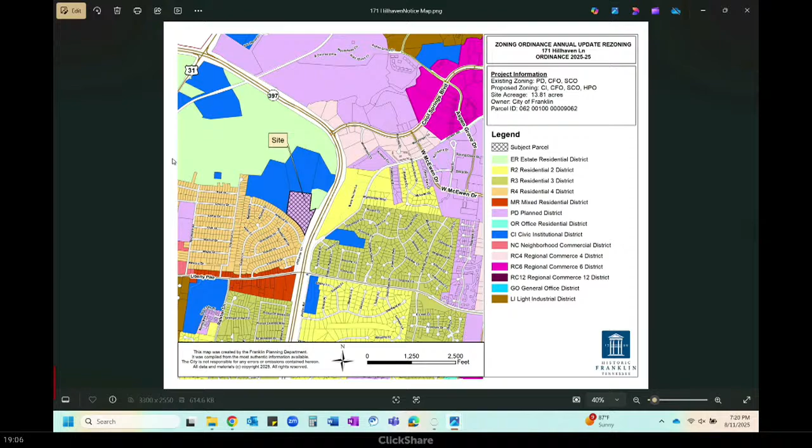Is there any citizen here who wishes to comment on this particular item? Okay, I see no one. Okay, I would take a motion, again this is for a recommendation, not for a COA.

So, motion for recommendation of the rezoning request to the Planning Commission and BOMA. Mr. Chair, I move to recommend to the Franklin Planning Commission and to the BOMA a favorable recommendation for rezoning into the Historic Preservation Overlay, the two parcels presented. Is there a second? I'll second. Okay, Madeline, thank you.

Any discussion? None? Yes, I have been to the parcel that is adjacent to Roper's Knob. Franklin's Charge has done a great job in supplying that to the city, and it's great to see the other coming into the historic zoning overlay too. Okay, thank you for that.

Anybody else? All right, we have a motion for a favorable recommendation to Planning Commission and BOMA for these two parcels to be rezoned into the historic zoning overlay. Is that what it's called? Historic Preservation Overlay, HPO. Close, I missed the operative word.